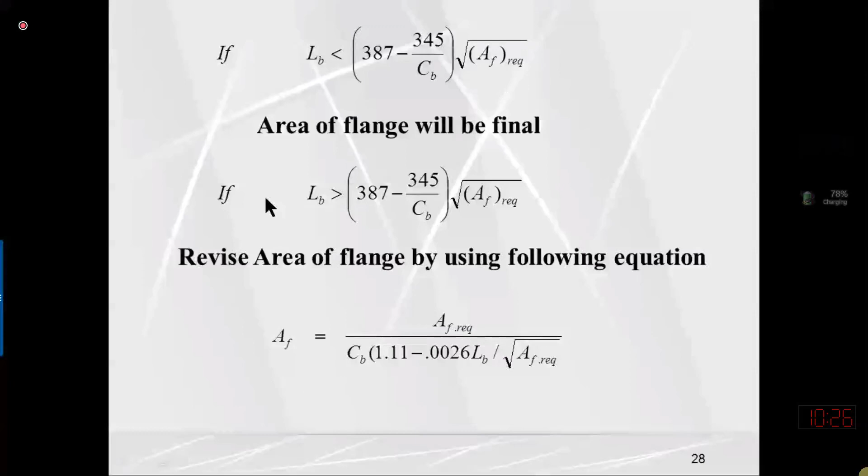Using this parameter, we will compute the updated area of the flange by using this equation. The area of the flange required is previously determined by this equation. Once we have determined the area of the flange, we are equating the lambda f value, which is equal to bf over 2tf value, with lambda p.

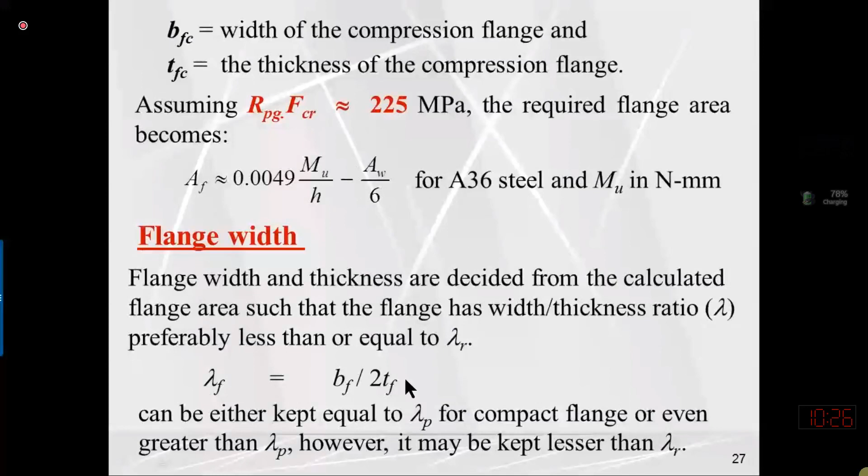To compute the width of the flange, lambda f value is equal to bf over 2tf value. We are multiplying and dividing this factor by bf, and equating that our flange should be compact. Anyhow, it may be non-compact, but we are determining the bf value by assuming that the flange would be compact. So bf multiplied with bf is equal to bf square, and bf into tf will be multiplied, which is equal to area of flange.

If we bring the 2 times of lambda to the other side and take the under root, we can determine the width of the flange by this expression, by equating the slenderness ratio or B over T ratio of the flange with lambda p.

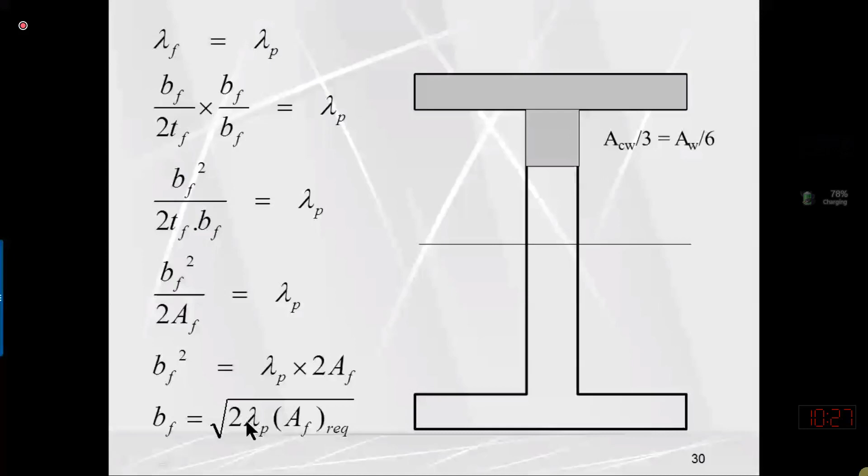Lambda p value is equal to 10.8 for the compact flange, and lambda r value is computed by this parameter, which is 19 for A36 steel. I have already explained this.

After determining the bf value, the width of the flange should be between h by 3 to h by 6. So width of the flange should always be more than h by 6. If the width of the flange is lesser, it will have lesser moment of inertia about the y-axis.

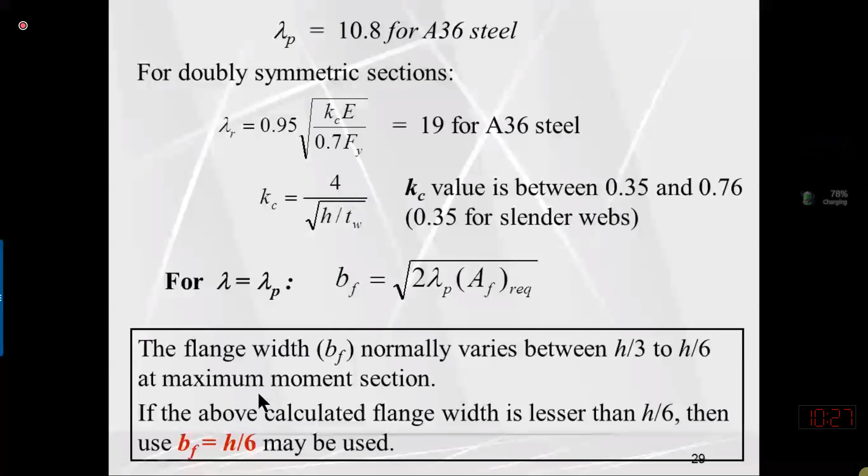The bf value should be rounded to the nearest multiple of 50 mm. Whatever is the bf value, we will round it to the multiple of 50 millimeter to the nearest side.

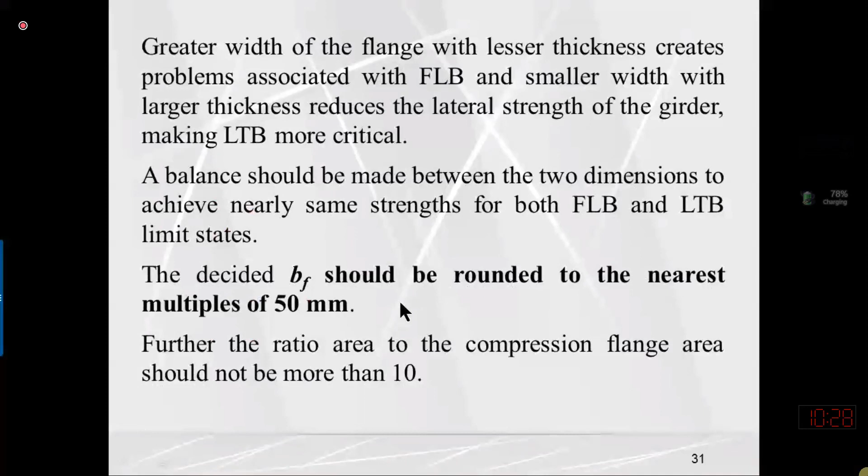Once we have determined the bf value, the area of the flange will be divided by the bf value, and we can determine the thickness of the flange.

After determining the thickness of the flange, if the thickness of the flange is less than 10 millimeter, it should be rounded to the multiple of 2 mm. For example, if the thickness is coming out to be 7.3, we will round to the multiple of 2 millimeter on the upper side, so we shall use 8 millimeter.

So if the thickness is 8.4, we will use the thickness of the flange as 10 millimeter, a multiple of 2 millimeter on the upper side. But if the thickness of the flange that we have computed from this expression is between 10 mm and 40 millimeter, then it is selected in the following order to the upper available size.

For example, this equation gives the answer 12.7, so the available size on the upper side is 15. If the thickness of the flange comes out to be 16, we shall use the thickness as 18. And if the thickness is coming out as 15.3, we shall not use 15, because we will select the upper available size as 18.

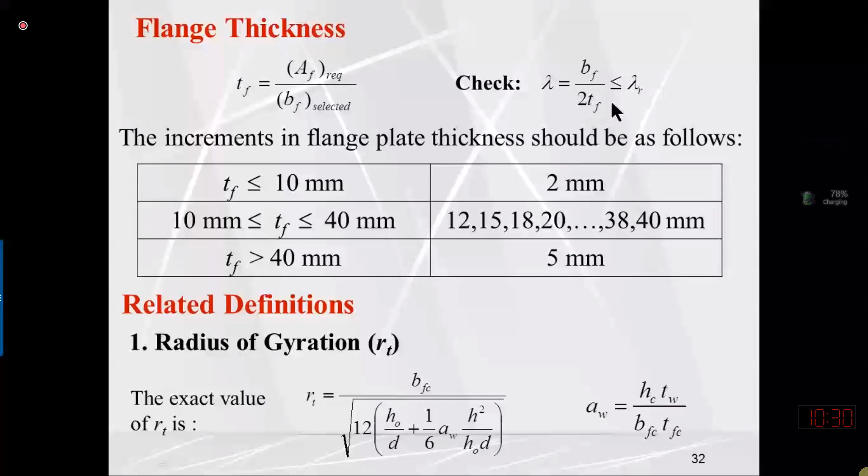Once we have decided the web and the flange size, the next check is we need to validate the capacity, or verify the moment carrying capacity, whether the moment carrying capacity is more than the applied load or not. So the moment carrying capacity will be depending upon the compression flange.

The moment carrying capacity formula is this one: Mu is equal to phi b times Mn. We can say that this bending stress is My, so sigma y, which we represent as Fy, is equal to My over I, or I over y is equal to section modulus.

So Mu will be equal to phi b times Mn, which will be equal to phi b into Fy into Sx. So the nominal moment carrying capacity is equal to Fy into elastic section modulus about the x-axis, multiplied by its phi b value. So we are exactly having this formula.

For a doubly symmetric I section, the tension flange, because the flange which is in tension, will always be stable, so it will never undergo buckling. So the nominal moment carrying capacity will be this one.

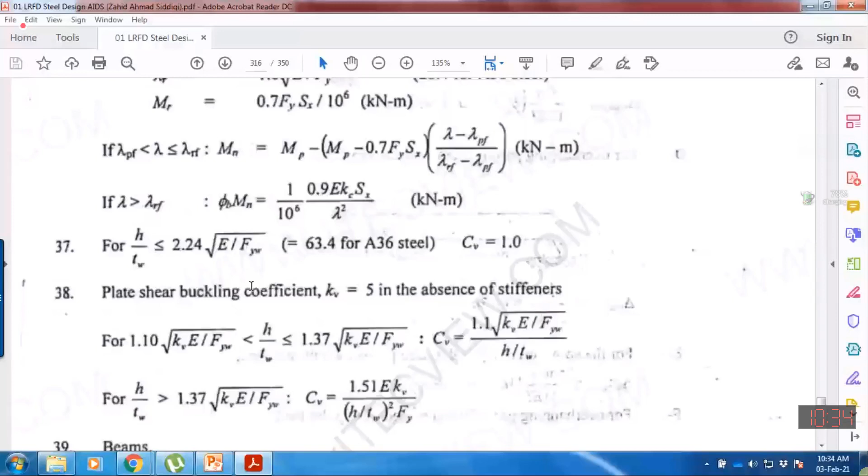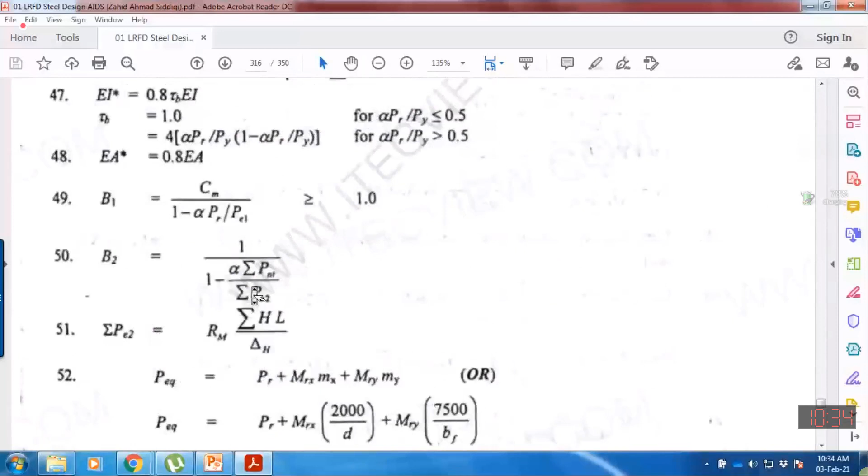You don't need to memorize these because all these equations are given in the LRFD design aid, page number 320. Yes, here. And RPG value, yes, page number 322, and the formula is given.

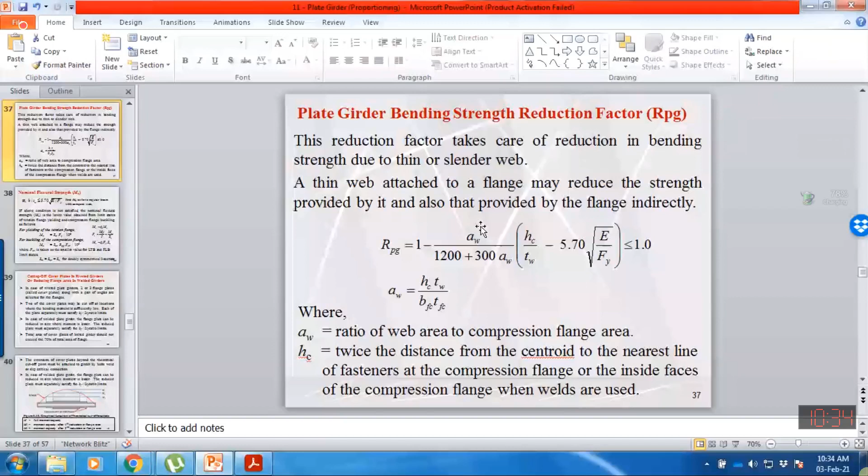So in this formula we require the AW value, the HC value, clear depth of the girder, thickness of the web, 5.70 times under root E over Fy, and AW can be computed by this parameter, which is the ratio between the area of the web to the area of the flange.

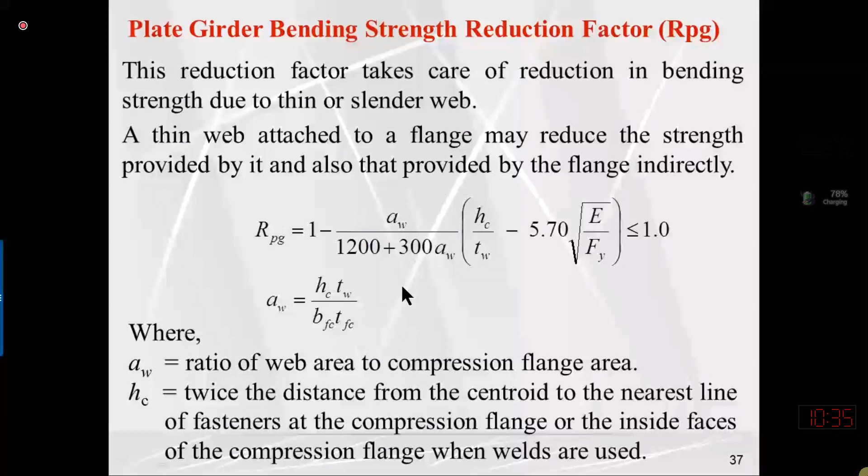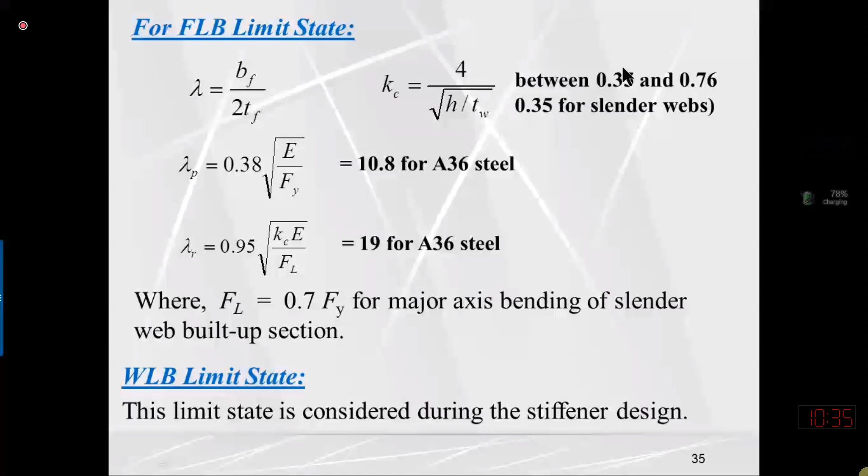And FCR value, how will we determine it? I have just explained this. Actually, we always determine the moment carrying capacity by this formula, because this formula will always give the lesser capacity, because the compression flange will always buckle before yielding occurs in the tension flange.

So we need the FCR value. One FCR value will be based upon lateral torsion buckling, and one FCR value will be based upon flange local buckling. So we shall determine one value from here and one value from here, whichever is lesser will be used in the formula.

So FCR value based upon lateral torsion buckling will be determined by using the factors LP and LR. We will compare the unbraced length against LP and LR to check the class of the beam section with reference to lateral torsion buckling. If unbraced length is less than LP, our beam will be compact with reference to lateral torsion buckling, so FCR value will be equal to Fy.

If unbraced length is more than LP but less than LR, we shall use this formula, the same one used in beam design. But if unbraced length is more than LR, our beam will be slender with reference to lateral torsion buckling, so we shall use this formula. Depending upon the class of the beam section based on lateral torsion buckling, we need to use one of the formulas to determine FCR.

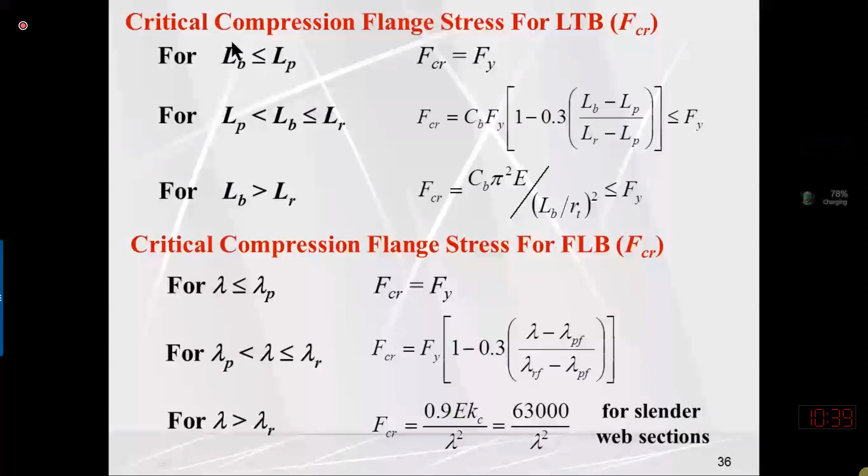So we have the expression for LP and LR values. LP value is 1.1 times RT under root E over Fy, and LR is pi RT under root E over 0.7 Fy. For A36, E value 200 gigapascal or 200,000 megapascal divided by 250. For A36, LP value is equal to 31.1 times RT, and this will be in millimeters.

By dividing by 1000, we can convert into meters. Similarly, LR value for A36 is 106.2. This means that if we want to compute LP and LR value, we must know the RT value.

And what is the RT value? That is the radius of gyration of the compression flange plus one-third of the compression web, taken about the y-axis. Last time I explained we have two formulas, either using this one or this one, because this formula is simplified from that one.

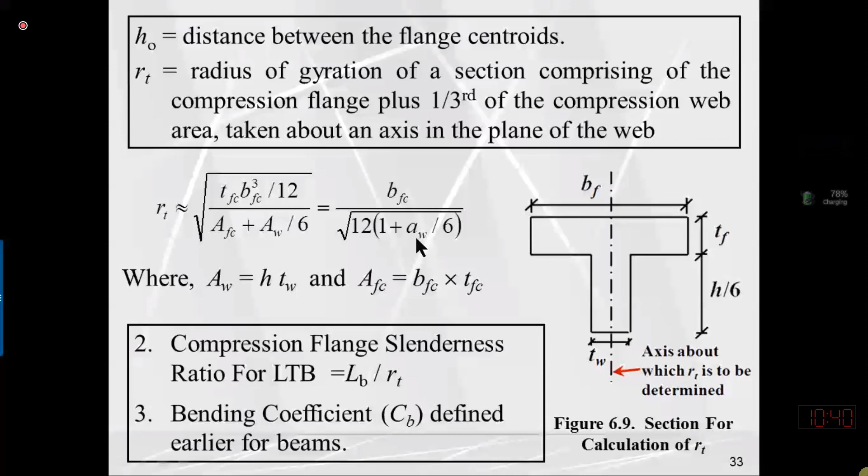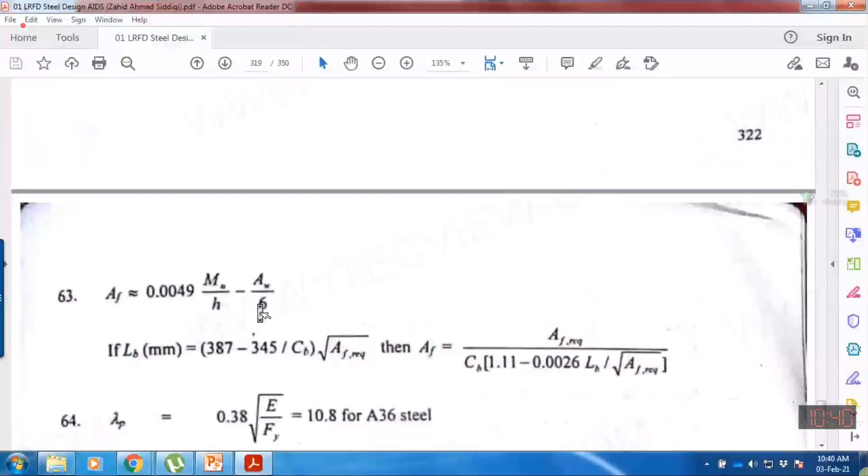So we need to compute the RT value using either formula. We know the width of the compression flange. The AW value is the ratio between the web area and the flange area, and this value is also given in the LRFD design aid. So lambda p value is 10.8 for A36 steel and 19 for A36. Otherwise, we have to compute it.

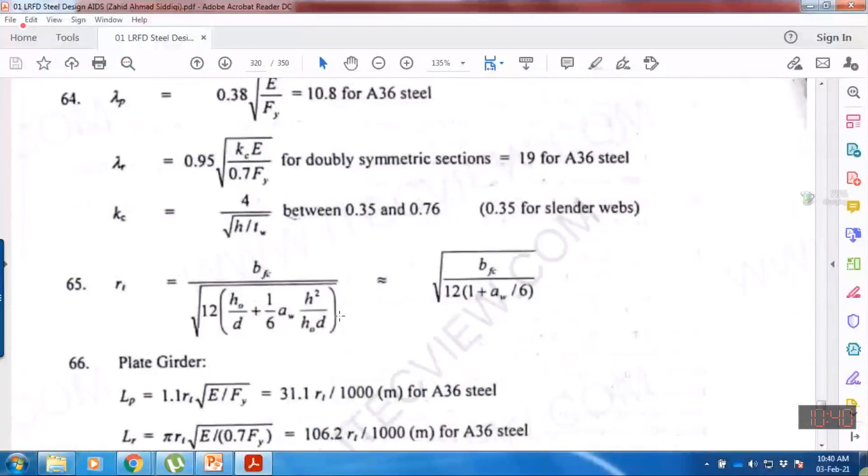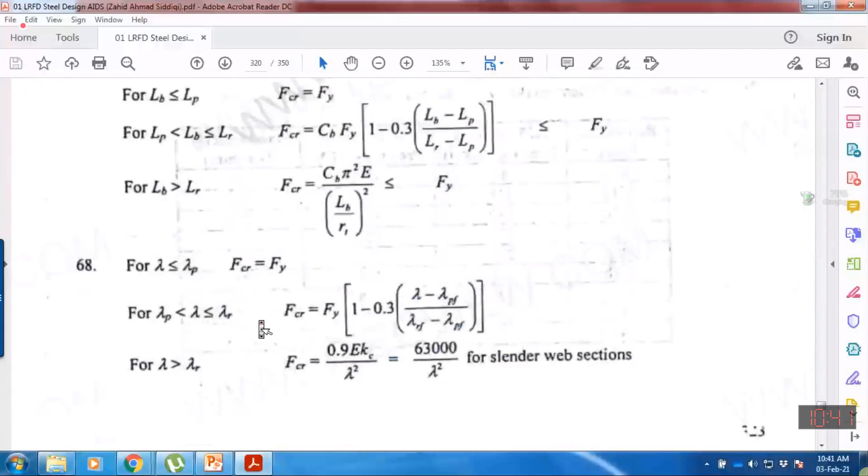The RT value formula is also given. By using either formula, we can determine the RT value, and once we know RT, we can determine LP and LR accordingly. Similarly, based on lateral torsional buckling, formulas are also given, and based on flange local buckling, the formula for FCR value is also given.

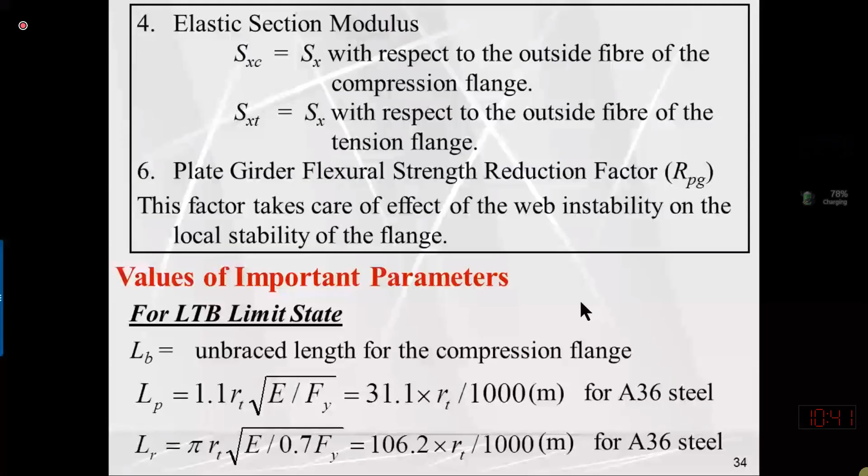So if the moment carrying capacity is more than the applied load, then that is okay.

I further explained that we always determine the section, or flange dimension and web dimension, based upon the maximum bending moment produced on the central portion. So we can economize our beam section along the length for different bending moments. For example, we can reduce the flange area or depth at a section where the moment is lesser, M1. By using M1, we can resize the flange dimension or web dimension. I have already explained that.

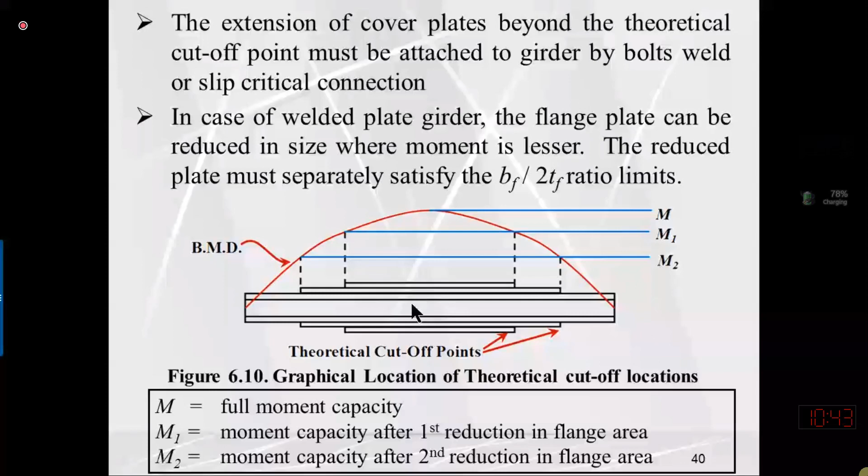And maybe at section 2 we have a lesser bending moment, so maybe we require only one plate. Or maybe in this portion the moment is larger, so we require two flange plates. In the center portion we require a thicker flange because the moment is larger, if we keep the depth constant. So we can reduce the flange area either by reducing the thickness of the flange, the width of the flange, or the depth of the web, as I already explained. We can further customize our plate girder depending upon the applied bending moment.

Okay, next we shall start the problem and cover just an overview, and next time we will study this problem again, but let me explain some data first.

The statement is: proportion a plate girder with a span of 20 meters to support a factored UDL load of 70 kilonewton per meter, in addition to self weight. So self weight is not included; we need to assume the self weight. So the factored load is 70 kilonewton, and two factored concentrated loads PU of magnitude 750 kilonewton, each load located at a distance of 7 meters from the roller and hinge support from either end.

The compression flange is laterally supported at the ends, so bracing is provided in the lateral direction at the ends and at the points of concentrated load, maybe with the help of a secondary beam or by some other means. And the girder is unsheltered. Why is this information given? Because this information will be used to decide the thickness of the web based upon the corrosion phenomenon.

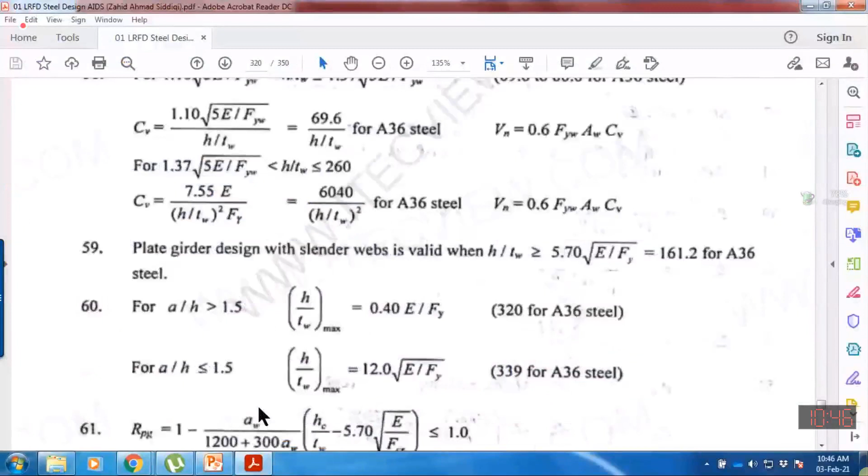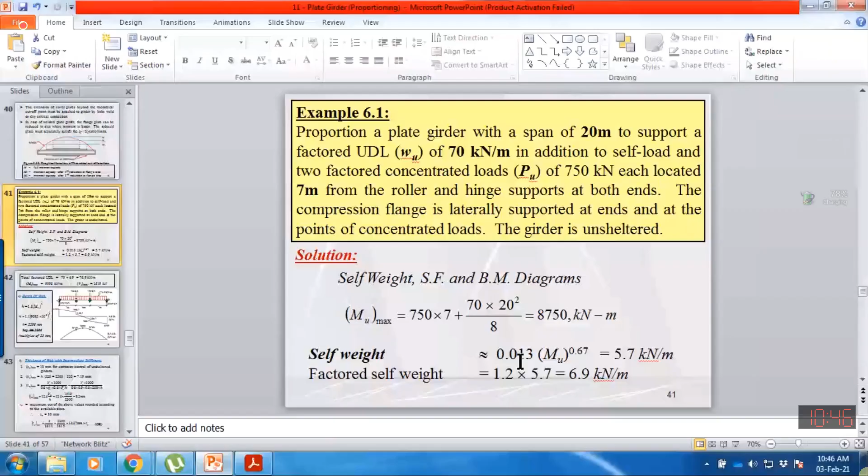You can split this beam into two parts for simplification using the principle of superposition: one beam subjected only to the load of 70, and one beam subjected only to the two concentrated loads. You can determine the maximum bending moment at the center for each and then add both bending moments to compute the maximum bending moment due to combined loading. The maximum bending moment due to the UDL load will be omega L square by 8.

That I have determined, omega L squared by 8. And due to the concentrated load, it's assumed that this beam is subjected to only load 750 and 750 K. The loading is symmetrical, so each reaction at point A and D will also be equal to 750, because loading is symmetrical, each reaction will be equal to half of total loading, or equal to the single point load.

If this load reaction is 750 on the upper side, you can determine the moment of this load: 750 multiplied by this distance, 7. So you shall have the maximum bending moment at point B. And the moment will remain constant from B to C due to the concentrated force.

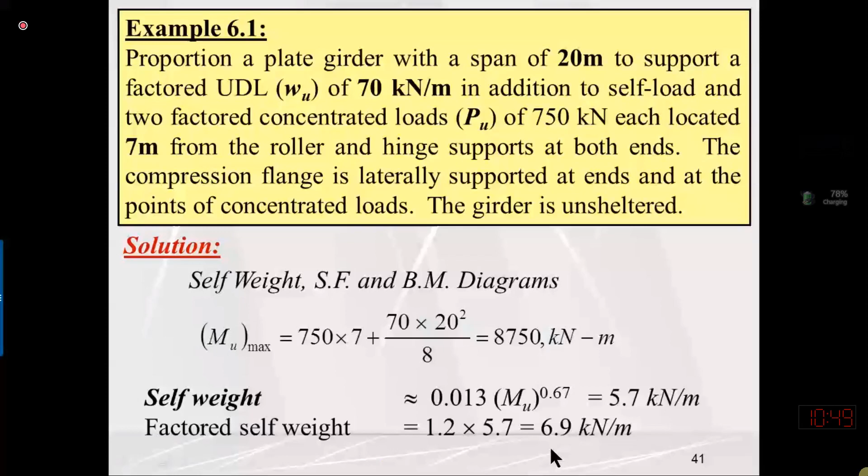So 1.2 is the overloading factor we are using. So we are converting the dead load into factored load, which is 6.9. Now we need to add this 6.9 load into the total applied load, because self weight is the distributed load, so we will add this 6.9 into 70.

So total applied factored UDL, or uniformly distributed load, will be 76.9. So now we have updated the loading, including the self weight, and the point load will remain as it is. After considering the updated loading, we need to determine this force reaction. Force reaction will be equal to omega L by 2 plus this P load, which is...

1519. So you can plot the shear force and bending moment diagram by principle of superposition, that is well and good. But if your concepts are not so strong, you can plot the shear force diagram and bending moment diagram by using the knowledge of your mechanics of materials and structural analysis.

So maximum shear force in this plate girder is 1519. The bending moment is 8749 at B, but the bending moment diagram is not uniform, so the moment is changing from 0 to a maximum value. But this center span is subjected to a minimum moment of 8749 and a maximum of 9095. So I'm assuming that segment B and C, whose unbraced length is 6 meters in the lateral direction, is the critical one.

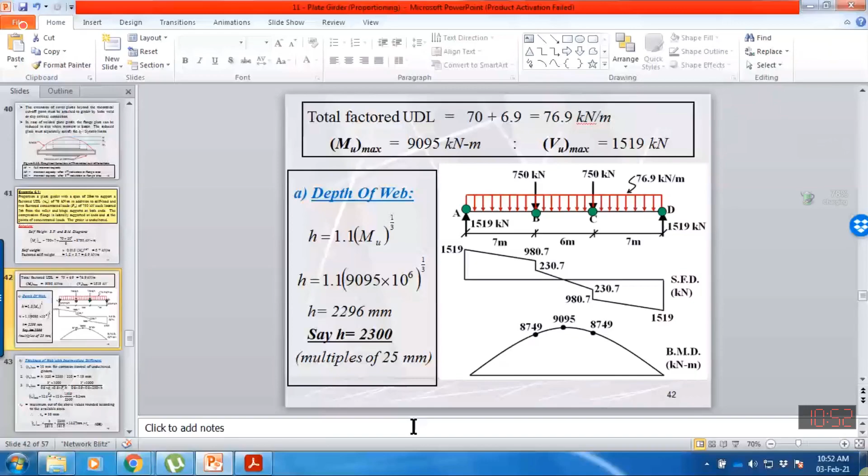So we shall determine the height of the web by using this formula, which is also given in LRFD design aids: 1.1 times Mu to the power 1 by 3. In this formula, the moment must be in Newton and millimeter, then we will have the height in millimeter. So we are multiplying it by the exponent 6 to convert the moment from kilonewton-meter into Newton-millimeter. When we get the answer, it is 2296.

So we will round this value to a multiple of 25 mm to the nearest side. So the answer will be 2300. So we have fixed the height of the web as 2300.

After that, we shall determine the thickness of the web. The thickness of the web will be provided corresponding to the minimum thickness. The minimum thickness of the web is determined by three equations, or three criteria, which we have already studied. So TW1 is based upon corrosion resistance. We are given the unsheltered condition, so this value will be 10 mm.

Second, depending upon web buckling, assuming that the A over H ratio is more than 1.5, or we are providing the stiffener at a spacing more than 1.5 times H. So the second criterion is H by 320. Height of the web we have already computed, so divided by 320 is 7.19. The third thickness is based on the maximum applied shear.

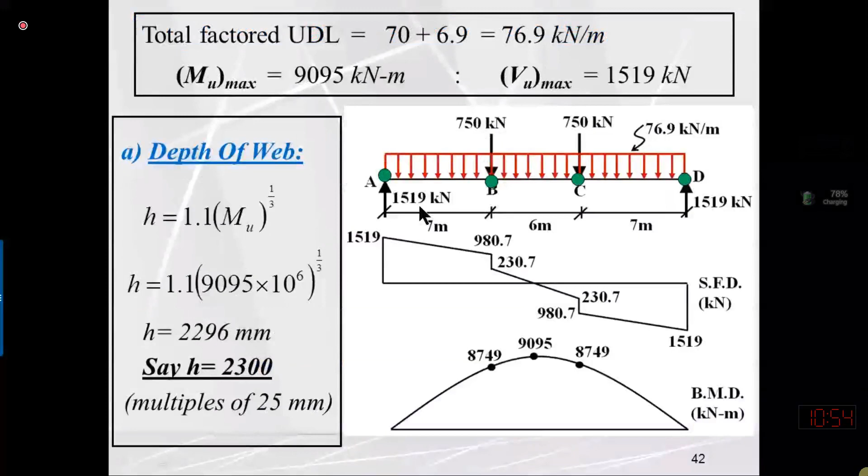So you can either use this formula or simplify this formula for A36, as we have discussed. VU value is 1519 kilonewton, which we have just determined, divided by height of the web. So thickness is coming out to be 8.2. Out of these three values, the larger value is 10 mm, so we are going to use the thickness of the web as 10 mm.

So this provided thickness we need to compare against TW maximum. This thickness should be less than the maximum thickness of the web that we may provide. TW maximum equals height of the web divided by lambda R value, or lambda 161.2 for A36, to make sure the web is compact, which is 14.27. So the thickness of the web we are going to provide is less than TW maximum, so that is okay. In case this value comes out to be 15, which is more than 14.27, we cannot provide the thickness of the web more than this value.

So what we can do is select TW maximum as our provided thickness, or we can increase the height of the web from 2300 to maybe 2350, maybe 2400. Because if we increase the height of the web, we will have a lesser thickness, since dividing by a larger number reduces the thickness. We shall see this in some examples. So web size is coming as 2300 into 10 mm.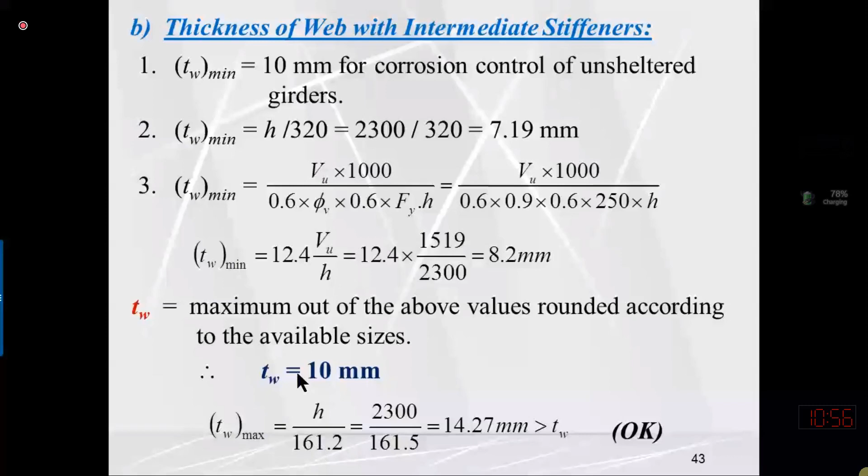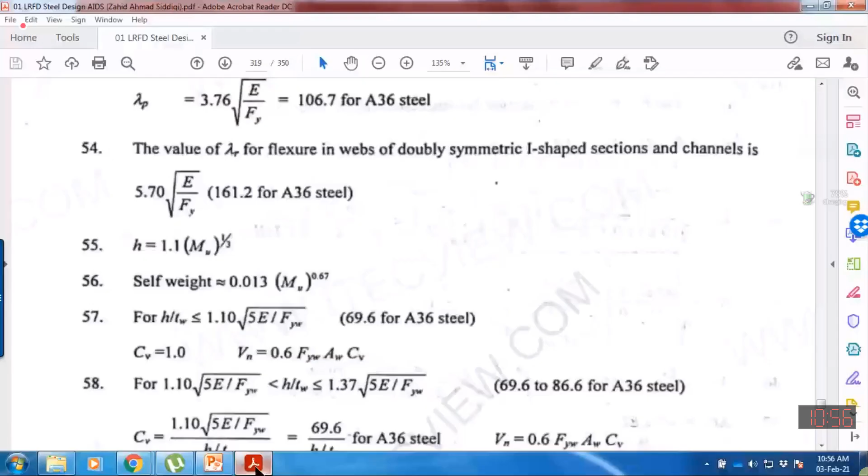So next we will decide the flange dimension. For the flange dimension also we are given a formula. Let's see where the formula is given. Yes, this one. So we are using this formula, where mu is in Newton-millimeter.

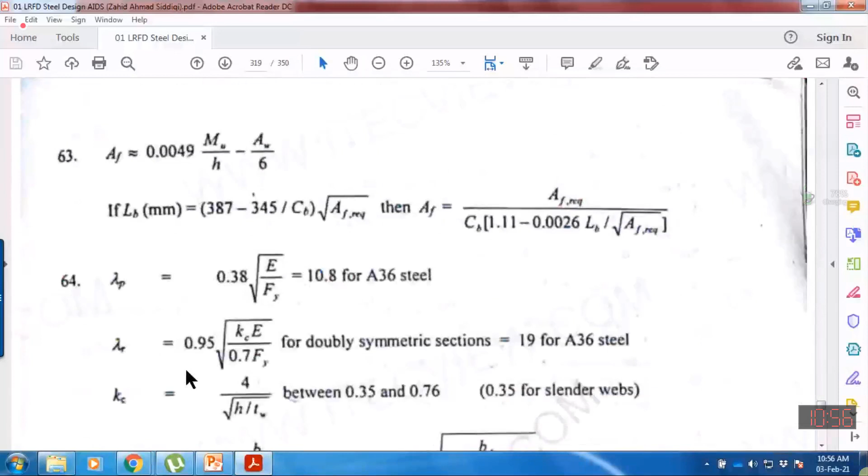We are substituting the value 9095 divided by 2300, which is the height of the web, minus the area of the web that we have just computed, height of web into thickness of web, divided by 6. So area of the flange is coming to 15,543. We need to check the condition, so we will compare this parameter with LB.

LB is 6 meters for our center span, which is critical, so 6 meter means 6000 millimeter. At the start we may assume Cb value equal to 1. This is the area of the flange we have just computed. We compare the right hand side with the left hand side, and the answer is coming to 5236, which is less than 6. So it means this condition is not satisfied.

So we need to revise the area of the flange using this equation, which is also given in LRFD design. We shall revise the area of the flange required, previously determined by this equation, with Cb value assumed as 1, LB of the given segment 6000, and 15,543. Actually you can also substitute the actual Cb value—I will explain that when we check the capacity.

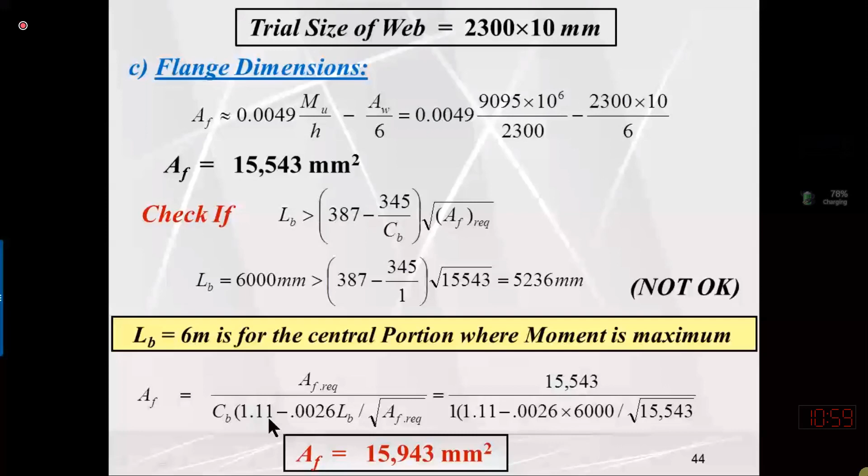BF value should be rounded to the multiple of 50 mm on the upper side, so when we round this value, it becomes 600. We need to make sure the width of the flange is more than height of the web divided by 6, which is also satisfied. Next we compare the thickness of the flange, which equals area of the flange divided by BF value that we just found. So area of flange divided by BF value, the answer is 26.57.

The available size on the upper side is 28 millimeter. After using 28, we need to determine the lambda value, which is BF over 2TF. BF is 600, divided by 2 times the thickness of the flange, and the answer is 10.7, which is less than lambda. It means our flange is now compact, because the flange may be compact or non-compact.

So how did we get this lambda R value of 19? Because lambda P is 10.8 for A36, and lambda R is 19 for A36. So lambda F is less than lambda R, so the flange can be used. I will stop here. Next time I will explain how we can determine the capacity after deciding the flange and web size.